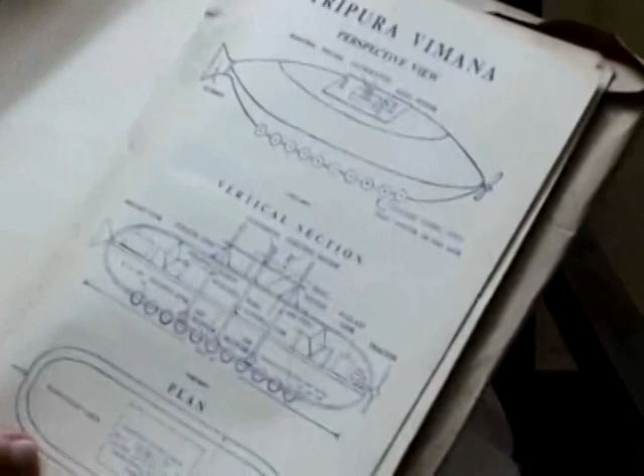All these descriptions in Samarangana Sutradhara correspond to modern space research, modern space findings—they refer to Mariner, Soyuz, Vostok, and other types. There are round types, square types, octagonal types, and hexagonal types. But here, Vimana refers to this type, and amazingly, the modern UFOs, unidentified flying objects, these are realities.

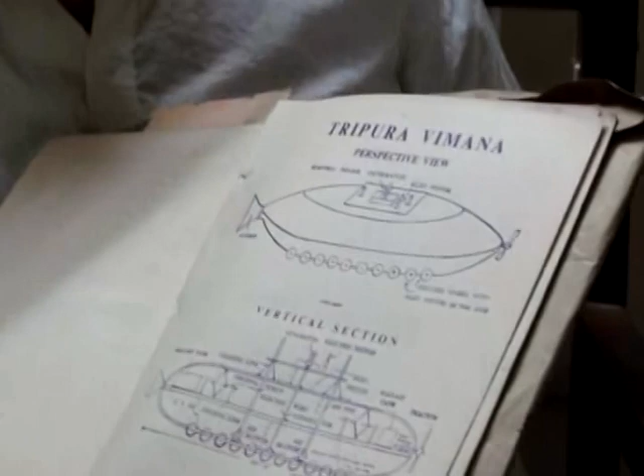These UFOs conform to this size, the Tripura size. This is very practicable, and this counteracts the space—the attractions in space, the changes of atmosphere in space. And I am showing you another one.

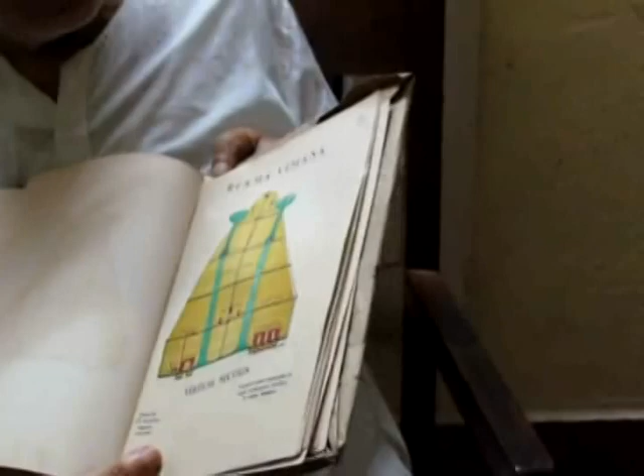This is the Vimana—the Rukma Vimana. Rukma Vimana and Sundara Vimana, the same type. Rukma Vimana, Sundara Vimana, these two types have been referred to in Sanskrit literature. Probably the Vedic description conforms to this Rukma Vimana.

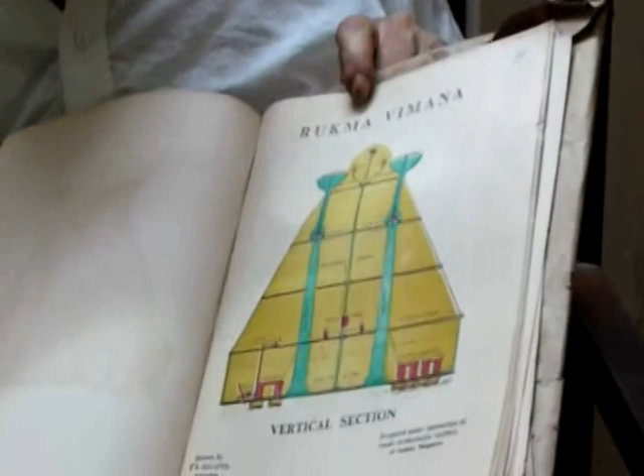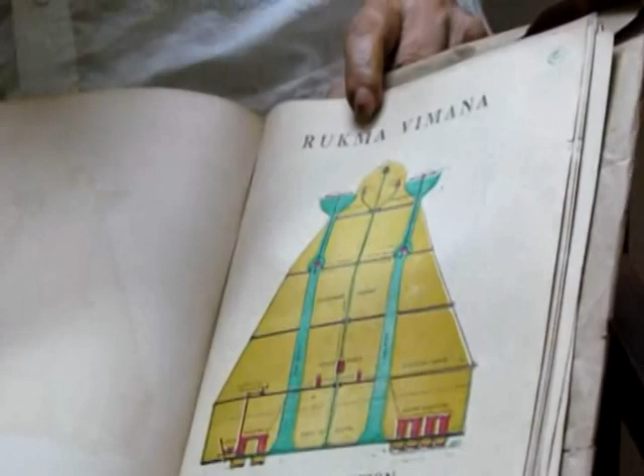Probably the Vedic literature conforms to this type, and Kalidasa's description also conforms to this type, because the Samarangana Sutradhara—this is also the Sundara type, this one. Kalidasa's description conforms to this one. The Abhijnana Shakuntalam also conforms to this description, this type particularly.

I have used this type, this model, in my book. Now in the Samarangana Sutradhara, there is a description in chapter 49 of the book. Therein it is said that Brahma, in days of yore, established five Vimanas.

The Vimanas have two meanings. Vimana firstly means flying machine, and secondly, Vimana means very tall, very high-rise buildings—7-story or 8-story buildings. These have no reality at present.

But the excavations at Patna reveal there was a 7-storied wooden building in the time of Ashoka. So 7-story or 8-story buildings were realities at that time. And Vimana, because the uppermost part went into the sky, so from similarity with the Vimana which flies to the sky, and these buildings which are tall, high-rise buildings, some similarity has been drawn.